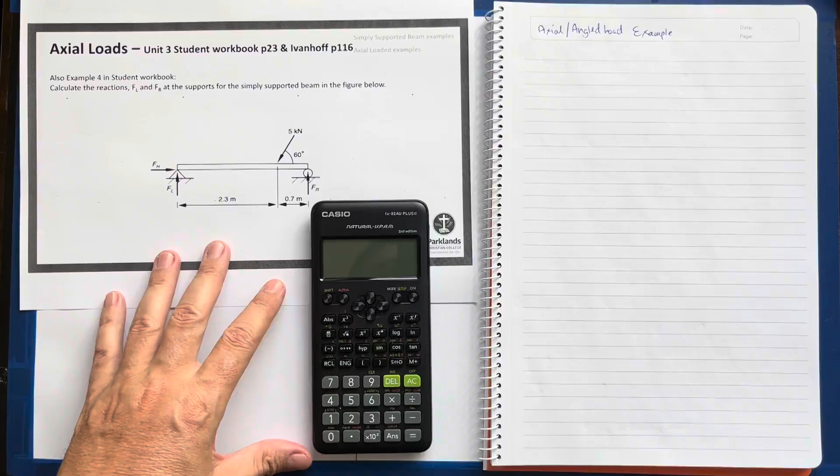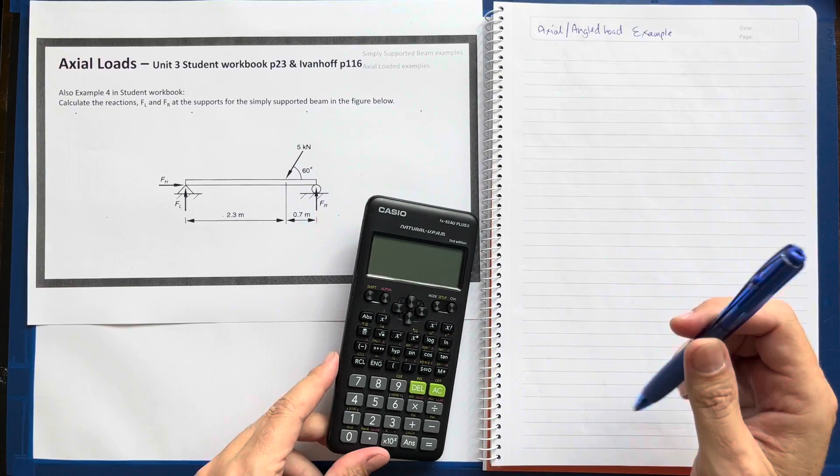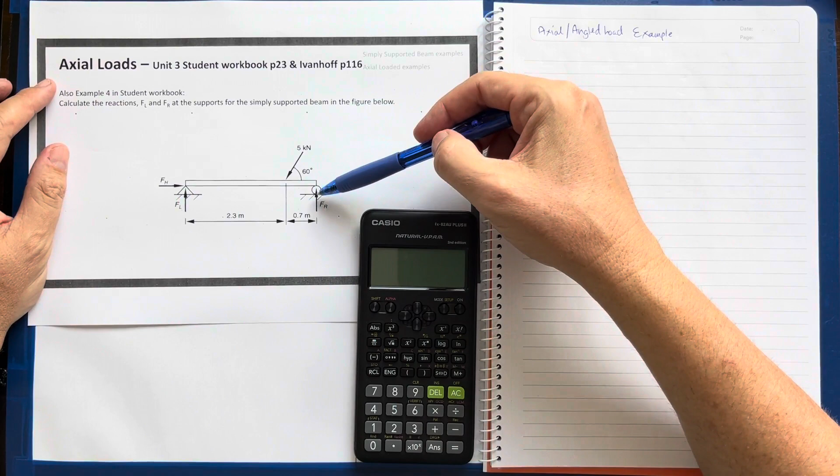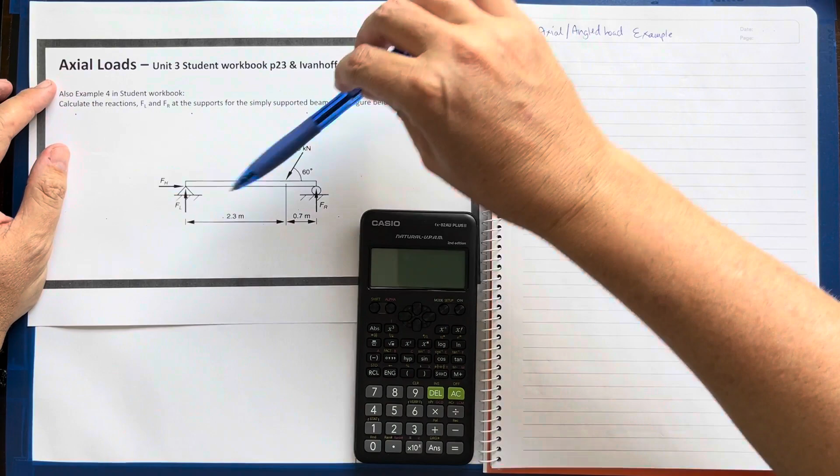I'm going to look at this particular question where we have a simply supported beam with a fixed or pinned support on the far left hand side and a roller support on the far right hand side. About 0.7 meters from the right hand side we have a load, but it's not a normal perpendicular load. It is actually at 60 degrees from the horizontal plane. The question asks us to calculate the reactions at both the left hand side and the right hand side supports.

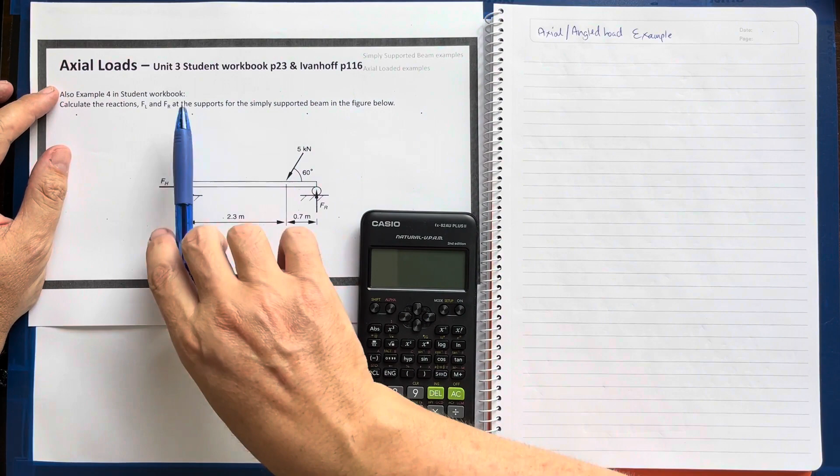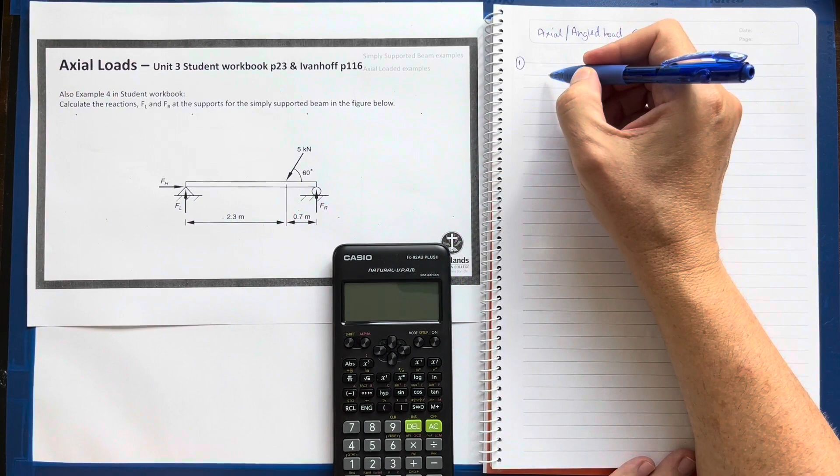Let me jump straight into it. The first thing I'm going to do is redraw this so that I make sure I do not make a mistake. So I have a fixed or pinned support with a beam and a roller support, just to get my clarity. This is a fixed or pinned support, R left. This is my R right, my reaction on the right.

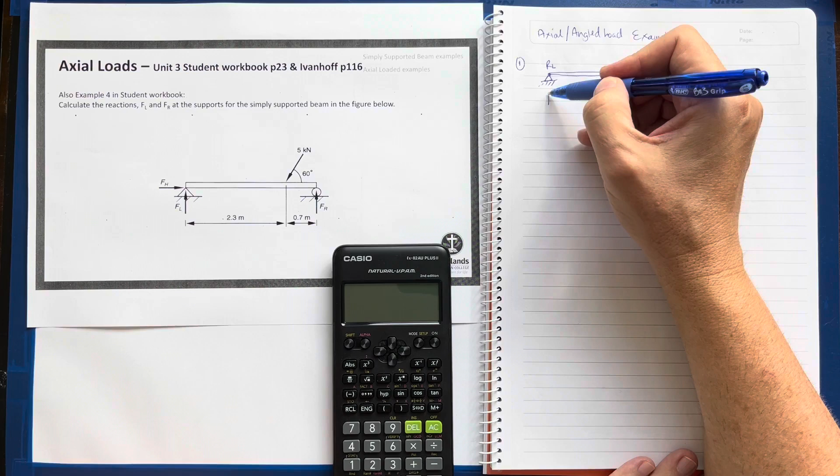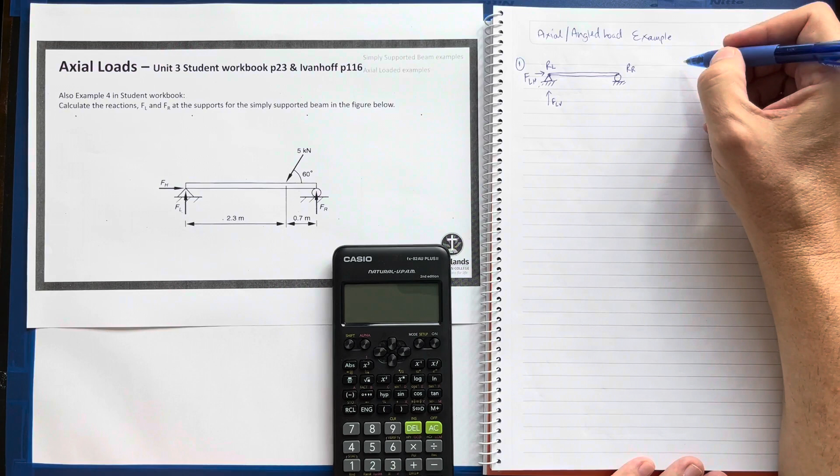Being a fixed support, I know I will have a force on my left vertical, and a force on my left horizontal. I automatically assume, looking at this whole beam in equilibrium, that all my vertical forces up will be positive, all my vertical forces down will be negative, all my forces to the right will be positive, and all my horizontal forces to the left will be negative.

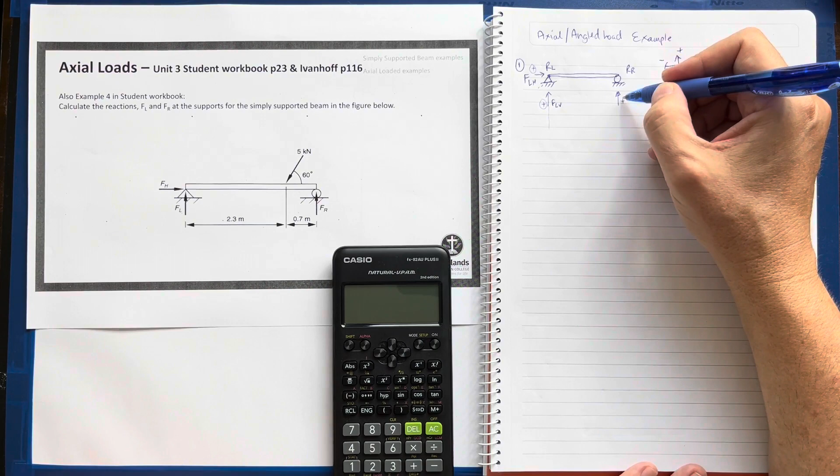So straight away I assume they're positive, so they're looking like they're going upwards, and I assume it's positive so it's going to the right. This one is a roller support, so it's only going to be in one direction, a vertical support. I'm going to assume it's up as well. You automatically assume they're up, and the calculations will tell you something different if it requires to.

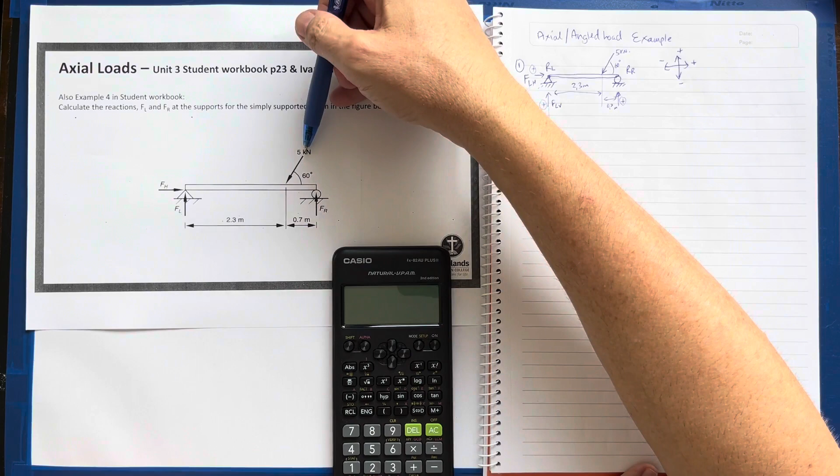From there to there it is 0.7 meters. I'm doing this a long way, when you do your exams it'll be a lot quicker. And 2.3 meters from the left is this force that is 60 degrees from the horizontal plane, and it has 5 kilonewtons. Our units are meters, and the force is kilonewtons, so we don't have to do any changes, nothing special.

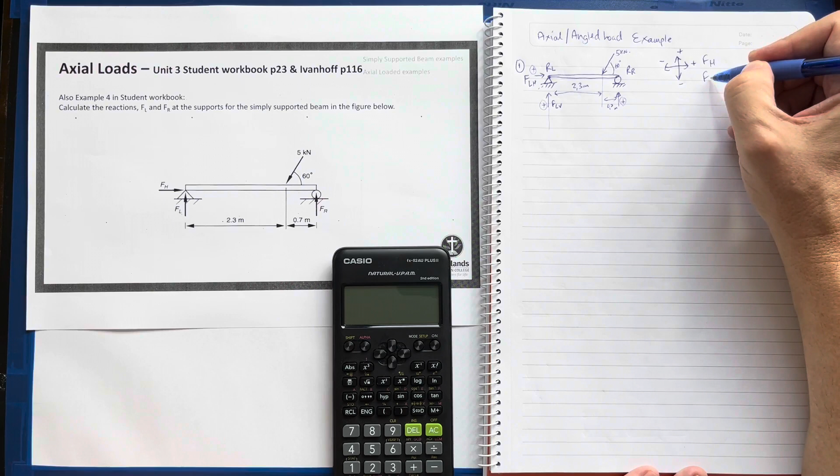Jump to the assumptions quickly. As I said before, these are my force horizontal and force vertical, vertical being there and horizontal being there. Because it's in equilibrium, the sum of the forces down will equal the sum of my forces upwards, which gives me that if I put this over, it goes over to the other side and becomes force downwards.

The same applies for my moments. A moment is effectively the turning effect of the force acting on this particular body relative to a point. So for this entire beam, my left hand side clockwise moments will equal my right hand moments. The sum of all the moments across this beam should equal 0, because we haven't been told it's not in equilibrium. Therefore the sum of my counterclockwise moments equals the sum of my clockwise moments. You don't have to do all of this in the exam, you just draw a little picture, but I'm doing it to continually remind you.

They're both positive, I move this to that side there. 0 equals the positive sum of my clockwise moments minus the sum of my counterclockwise moments, which gives me clockwise as positive and counterclockwise as negative. So those are my assumptions already.

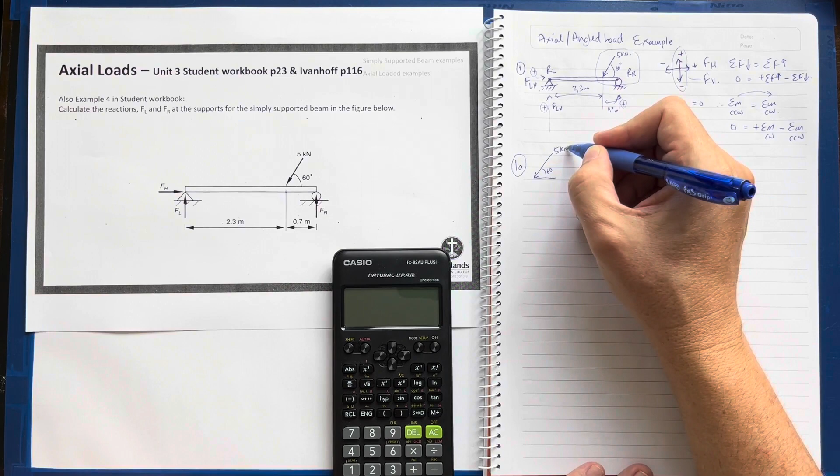So this is my hypotenuse, this is my opposite, and this side is my adjacent. I'll probably go through the basics of resolving these to horizontal and vertical forces. But we know from previous work that my force vertical equals my hypotenuse times sine theta.

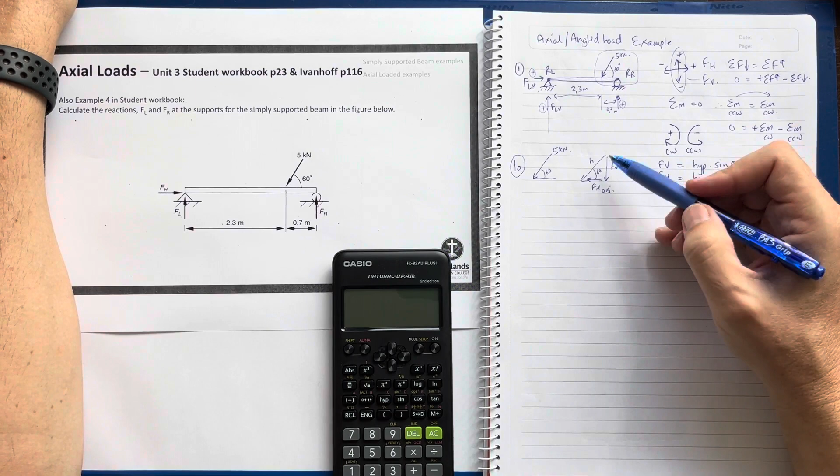And the same with my force horizontal is going to be the hypotenuse times cos theta. So straight away I can work that out. I know that my hypotenuse is 5 kilonewtons that way and the angle is 60, so it'll be 5 kilonewtons times sine 60 degrees, and that's my vertical.

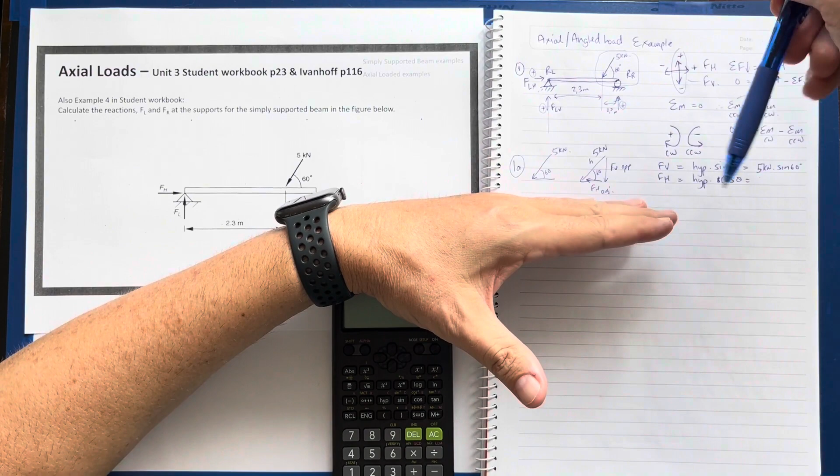Obviously, if I'm pushing on a force that way, I'm going to be pushing in that general direction. This is my resultant, so it's going to be down and that way, because my resultant is pointing this way. You can just see it from the way the picture shows.

Also, don't forget, if I am at 45 degrees, a quick bit of theory here: if I'm at 45 degrees to the horizontal, my force vertical will equal my force horizontal.

If my angle is greater than 45 degrees, let's just say 60, straight away, just visually, you can see that my force vertical is going to be greater than my force horizontal. You can just see by the length of that - that length is longer than that length.

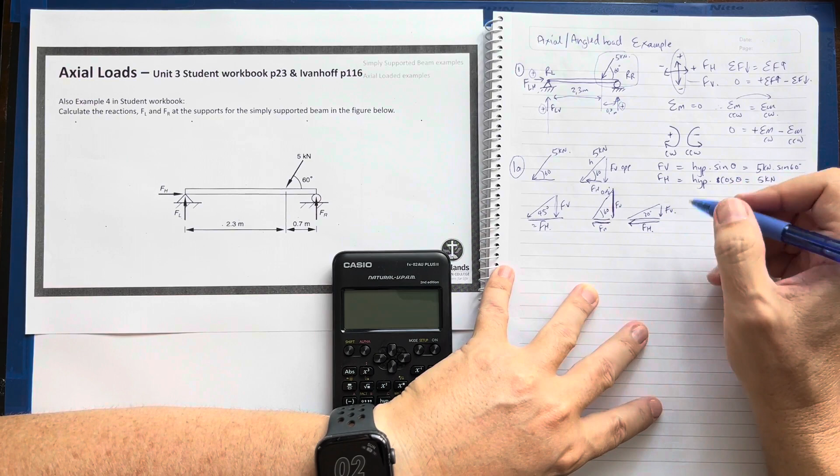If it is less, let's say 30 degrees, you can see that my force vertical will be less than my force horizontal - my force horizontal will be greater. So keep that in mind for a bit of common sense when you're doing your work.

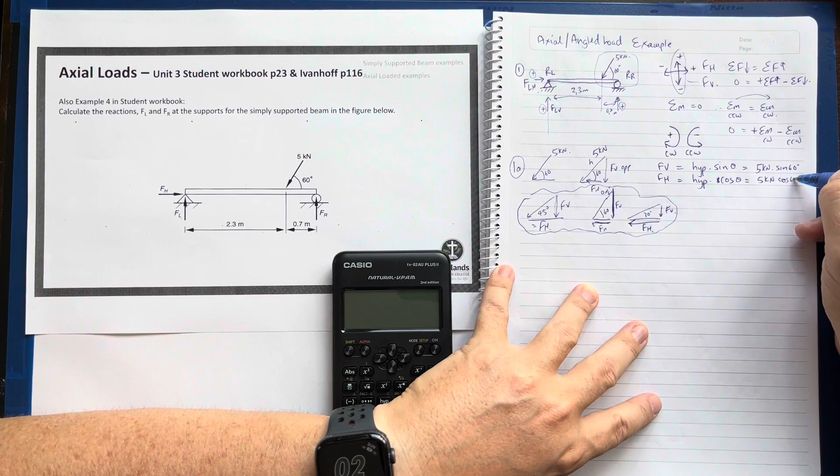So straight away, when we finish this, I tend to jump around a bit in my calculations - I hope that's okay. And therefore, my force vertical over here is, let me do this: that is 5 sine 60.

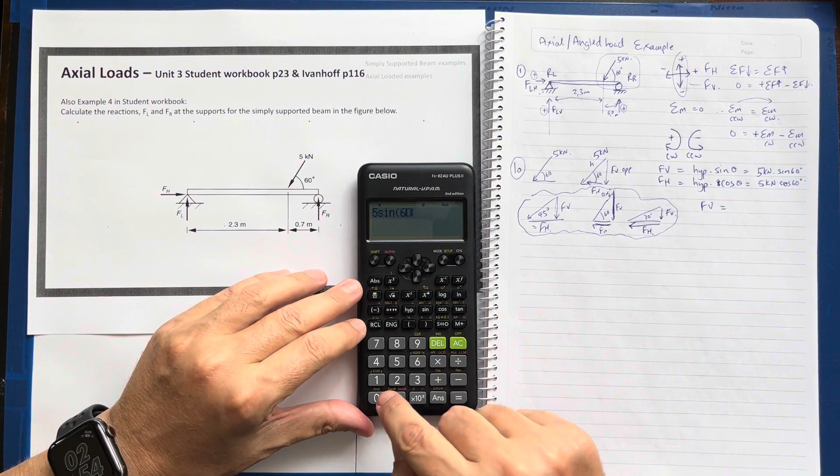4.33 kilonewtons. And my force horizontal is going to be less than that because it's a steeper angle, and you can see visually it's going to be less. So I'll go 5 cos 60, 2.5. So that actually makes sense.

You can see that. So technically, instead of having that, I resolve that to look like this, this being 4.3 kilonewtons and this being 2.5 kilonewtons.

And then I just solve for these, which is a right-hand reaction, which also technically is my force of the right vertical, and this would be my force of the left vertical, force of the left horizontal.

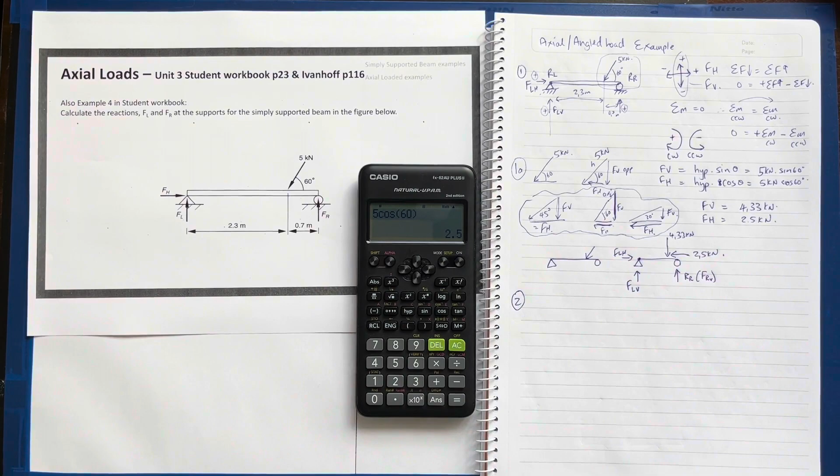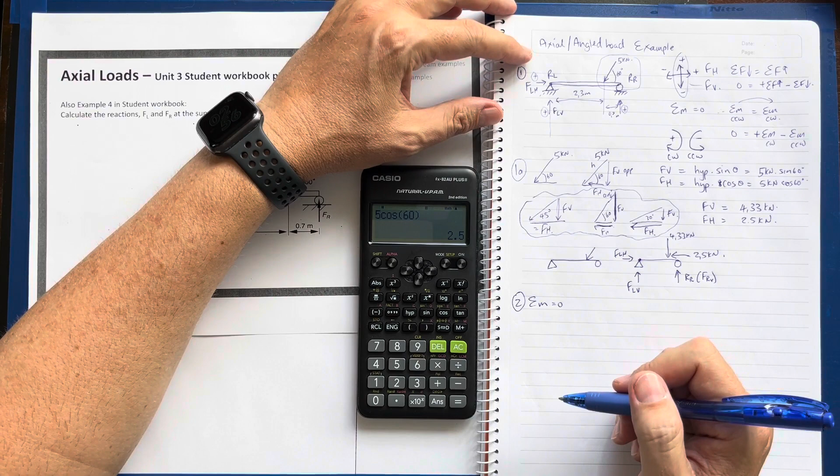So step number 2, I keep on saying so, I noticed that. We jump into doing a moment calculation. I've drawn the diagram, I put down my assumptions, I've calculated these, I've resolved the angled force to become both a vertical and a horizontal force. My next step is to do a moment calculation, sum of the moments, and my third step would be to do a vertical and horizontal calculation to work out the other side.

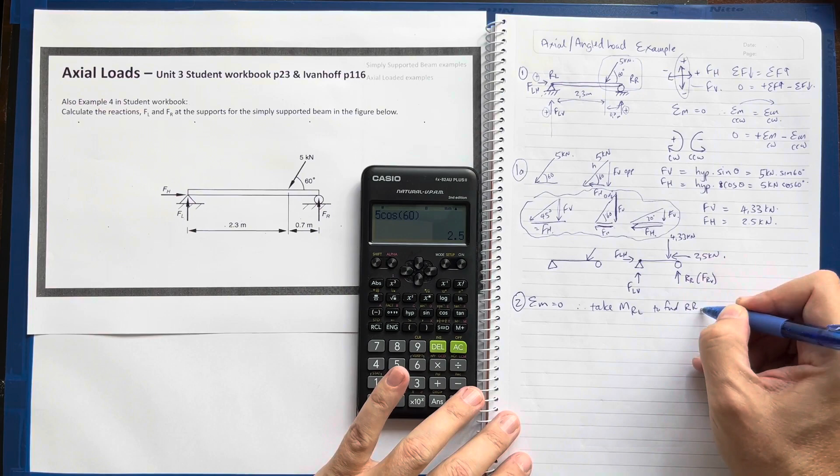Quickest way, start on the left, let's do moments about RL. Take moments around RL in order to find the side I don't know, which is RR. From this point, it now acts as if this beam is pinned there, and I almost ignore that force, and it can move like a seesaw pinned over there.

I now look for if the sum of the moments is 0, and I can work out 0 equals positive, all my clockwise moments. Don't forget to write down, my moment is force times distance. So it's force times distance minus force times distance. These are the clockwise moments, and these are the counterclockwise moments. Remember, I'm looking at that. So my clockwise moments are positive, and all my counterclockwise moments will be negative.

So let's have a look. From this point, what is going to cause - remember I now have resolved that to that and that - what is going to cause this to go clockwise? So that force there, so it's plus. What is my force? It is not 5 at that angle, it is 4.33 kilonewtons times how far is it from that point - 2.3.

Any other forces now causing it to rotate in a clockwise motion? I don't see any. So if I look then back at this side now negative, I'm going to do all my counterclockwise moments. I don't have any except for that reaction there, the force that roller support is supposedly supporting that beam at.

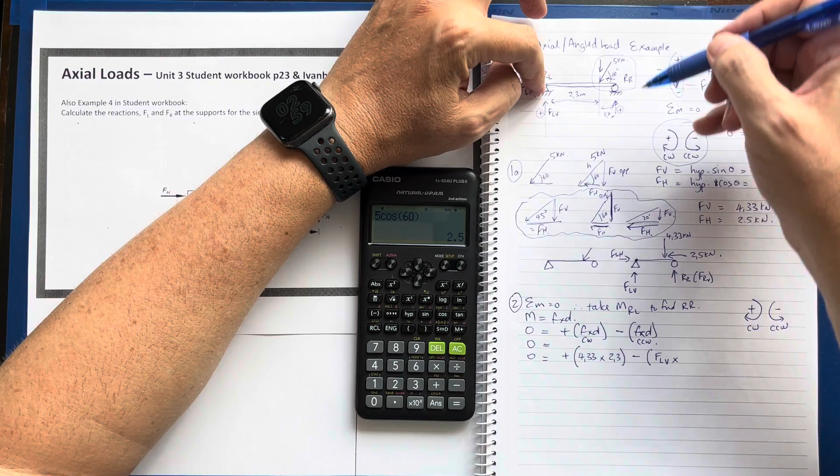So that is going to be force of the left vertical, that's my force pushing upwards, causing the beam to turn into a counterclockwise moment, which is why it's in the negative brackets. And it is 2.3 plus 0.7, is 3 meters from the end. There we go, I have no other forces to look for.

So let me work that out: 2.3 times 4.33 is 9.959. I'm going to leave it like that so I can be as accurate as possible. Minus 3 force left vertical. I'll take that to the other side: 3 force left vertical equals 9.959. Divide that by 3.

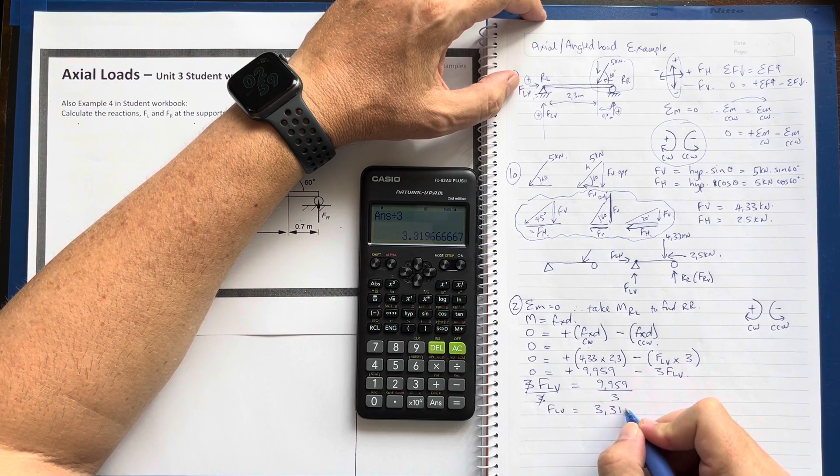Force left equals, divided by 3, 3.3196. Don't know how far you want to go, it's up to you.

So I know that my force supporting that beam on my right hand - I keep on saying L, I made a mistake, my apologies, so sorry. I don't know why I do that.

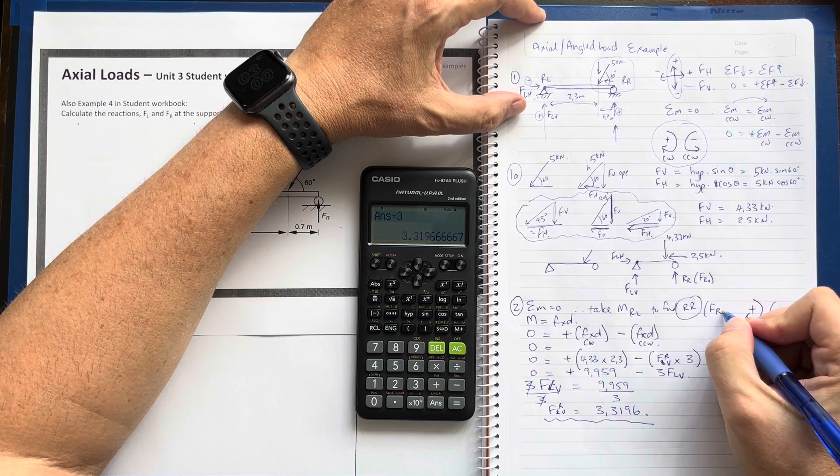Force right vertical - apologies for that. You're probably wondering why I did that. It's positive, because it's positive it is pushing upwards, so it is supporting the beam on the right hand side with a force of 3.31 kilonewtons upwards, don't forget.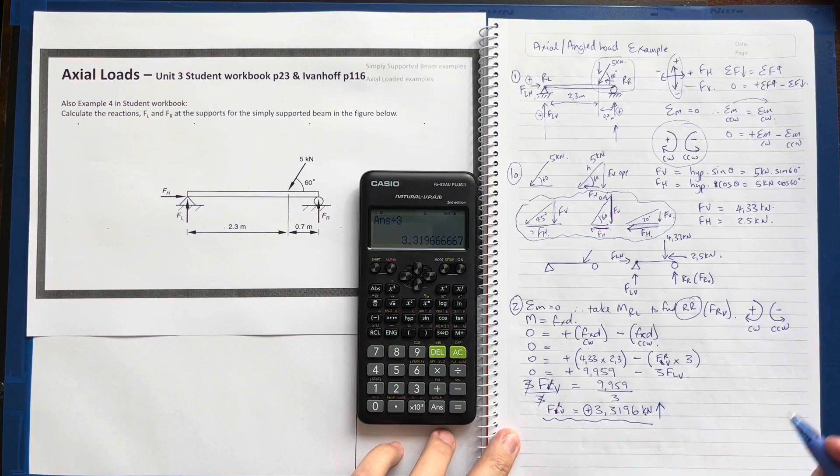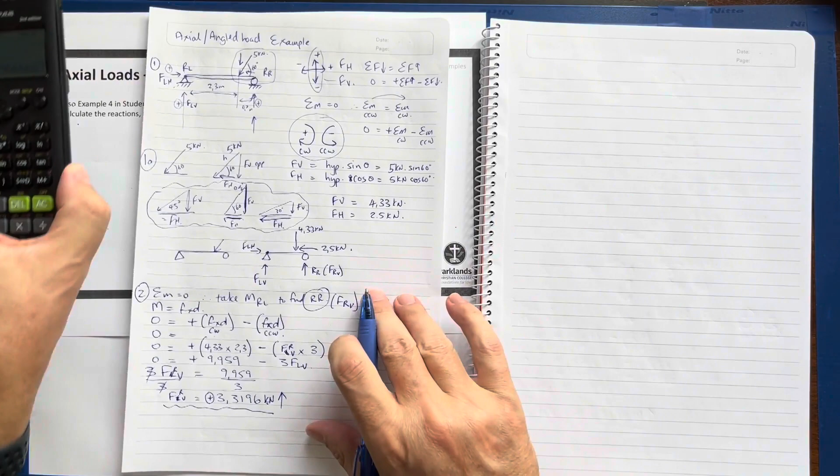I'm going to tear this off and continue with the next part. The next part is telling me I've found the side, tick, and I need to find the left and the right. So that is my step 3.

Step 3 is pretty quick and easy. I'll look at the force horizontal, because the sum of my forces to the left equals the sum of my forces to the right. I'll redraw it on this side again, and take this over to this side to prove my assumptions. 0 equals positive sum of the forces to the right minus sum of my forces to the left. You can see that all my forces to the left in my horizontal are negative and my forces to the right are positive.

So let's have a look, what forces do I have? I know there's a force to the right, but I don't know what it is, so I'm going to assume it's positive. Therefore it's going to be RL horizontal minus the force that I know is occurring here, minus 2.5 kilonewtons. That goes to the other side, so RLH equals positive 2.5 kilonewtons.

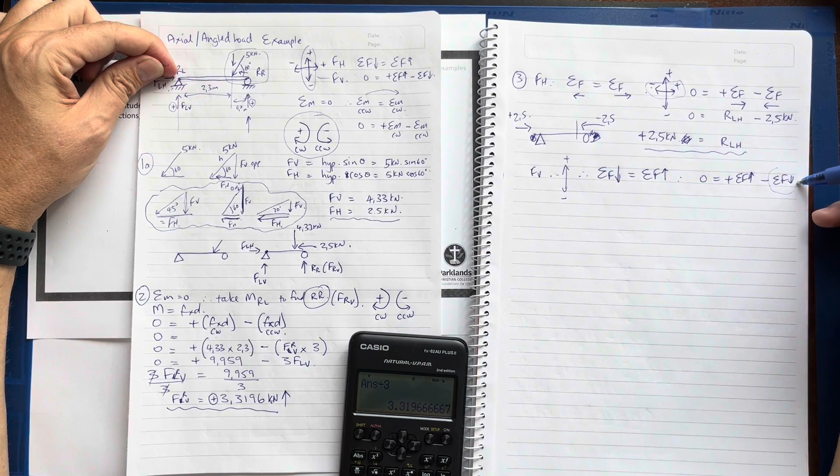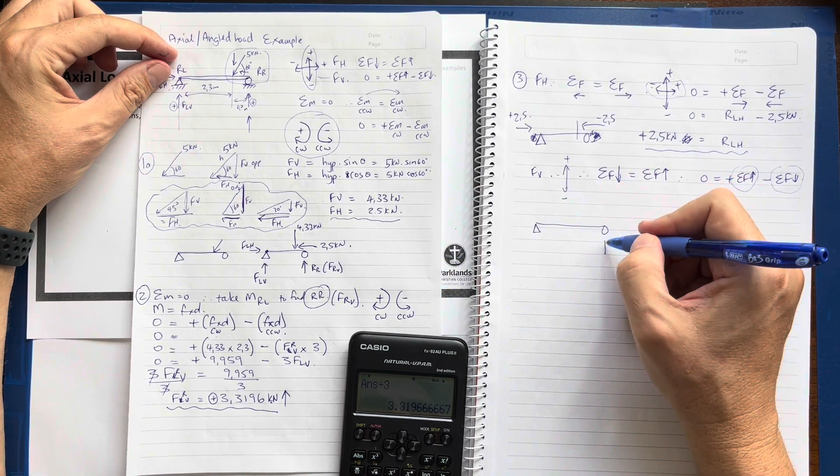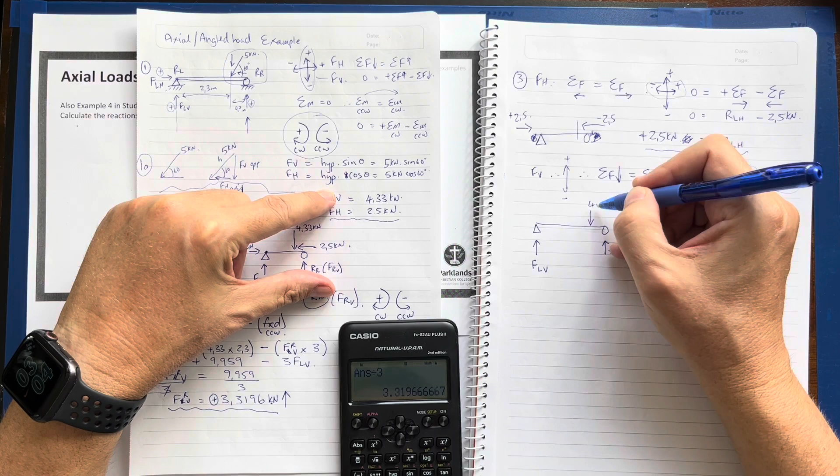So what do I have so far? I know what that force is - that force is 3.3196 kilonewtons up, that's a positive force. I don't know this, which is what I'm trying to solve, that is my force left vertical, and I'm only looking at my vertical forces. This is that force there, 4.33 kilonewtons.

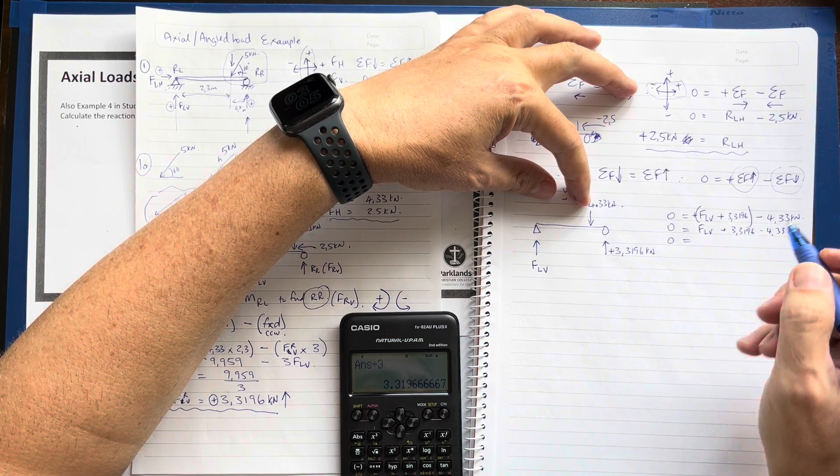So this is how we solve it. 0 equals all my forces pointing upwards. It is force LV plus 3.3196 minus the only force pointing down, which is 4.33 kilonewtons. So I'll extract that: force left vertical plus 3.3196 minus 4.33 kilonewtons. What does that become? Positive 3.3196 minus 4.33 is force LV minus 1.01.

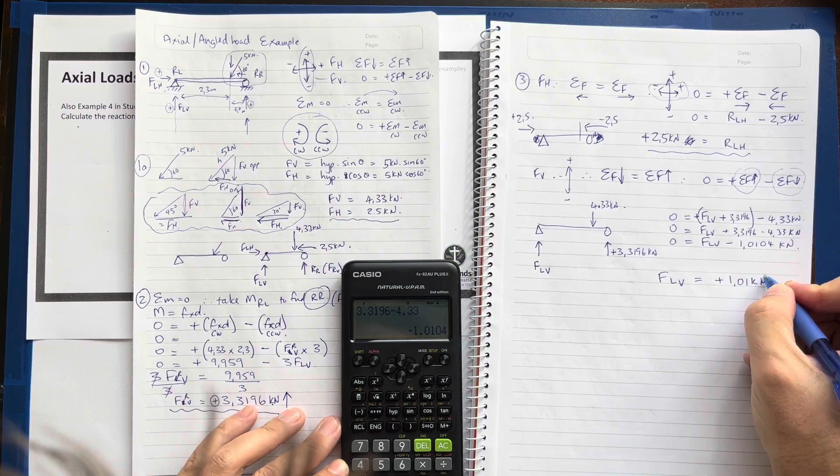If I want to go to the next level, I'll take that to the other side. Force left vertical equals positive, because it's negative it goes to the other side and becomes positive 1.01. I wouldn't go too far - there we go, I can prove that now if I draw a force diagram.

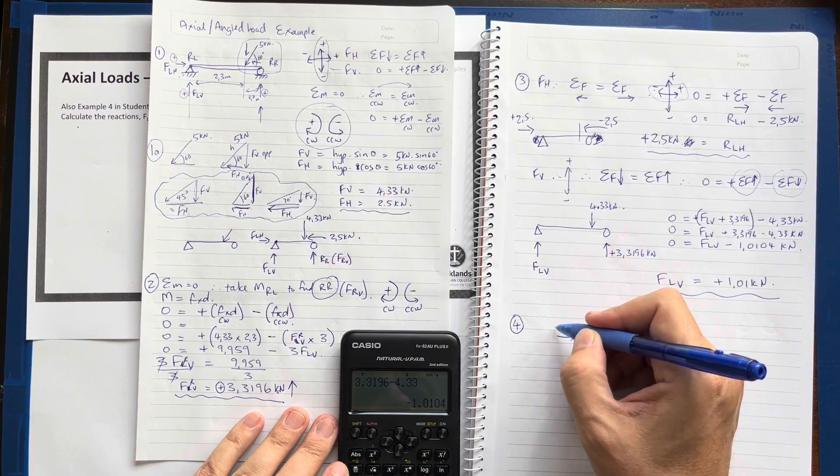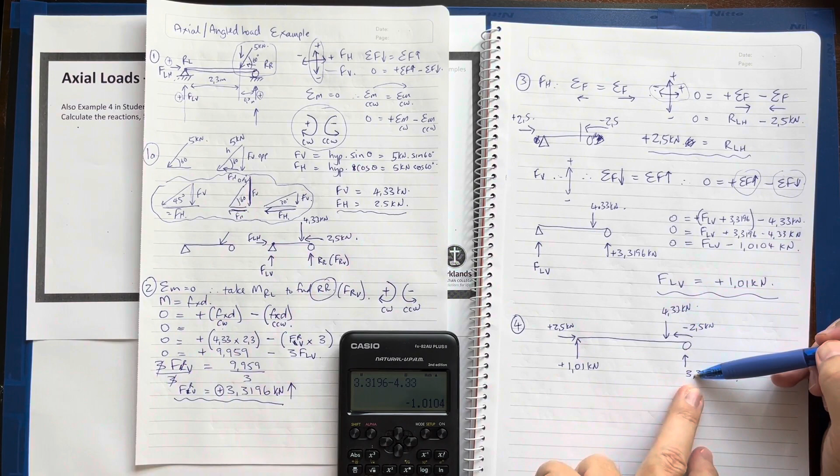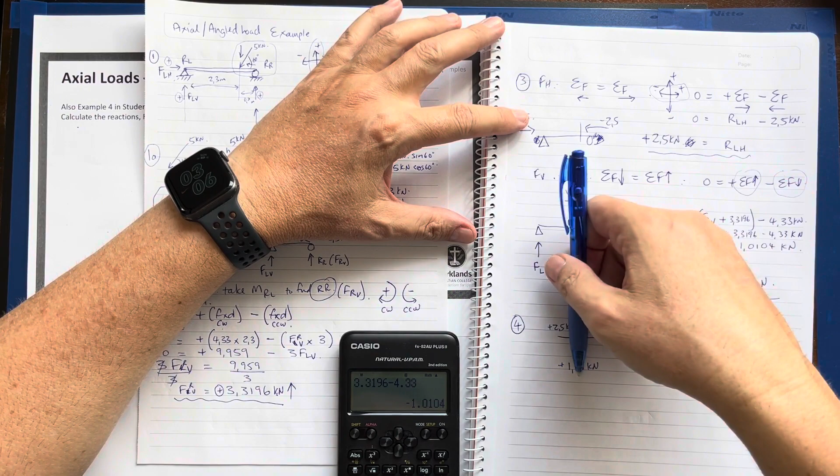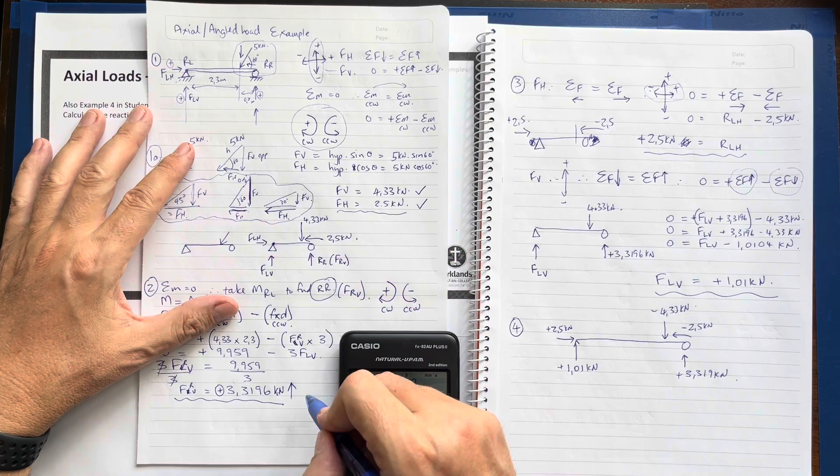This is now that answer there, 1.01 kilonewtons positive. This is 3.3 - yes it is 3.3. And this is negative 2.5 kilonewtons, and that is 4.33, that plus that. Technically when you draw this you don't have to put the signs in, but downward forces will be the same as those two added together, and your horizontal forces will be the same. That's your answer, and where your marks are normally allocated is finding that, that, that, and that. So this can be anywhere between 3, 4, or 5 marks depending on the marking schema of the teacher. I hope that makes sense.

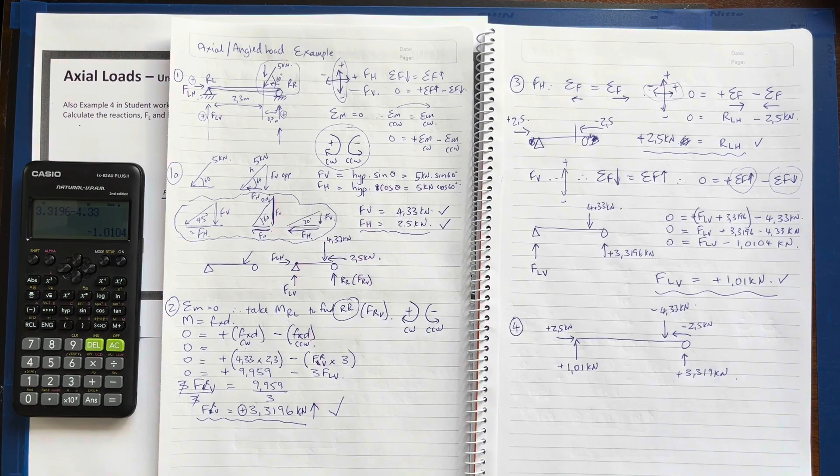And yep, I'm going to do 2 more examples with angled or axial loads onto a beam, just to give a bit more practice in resolving the angled forces into perpendicular forces or horizontal forces to the beam. And that's kind of how you do it. Hope that helps.